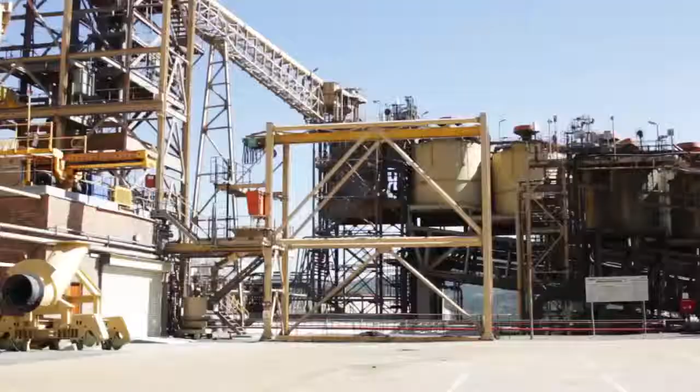Most continuous production processes operate for less than 30% of the time in ideal state, which represents substantial losses in terms of production output, costs, asset performance, quality, and impact on the environment. The time-in-state program implements a solution that increases the percentage time in ideal state and thereby delivers higher operational efficiency and effectiveness. Results include more than 18% increase in production output and increases in energy efficiency of over 7%.

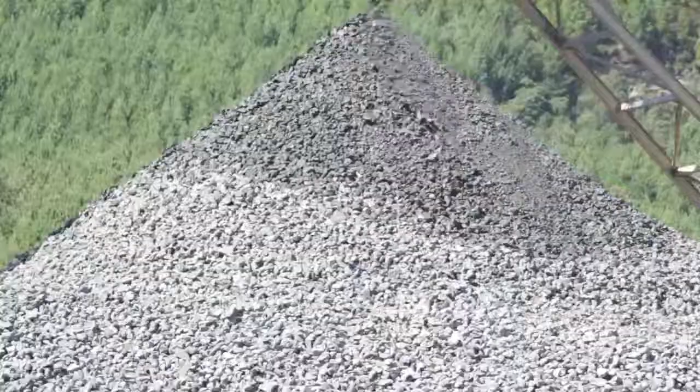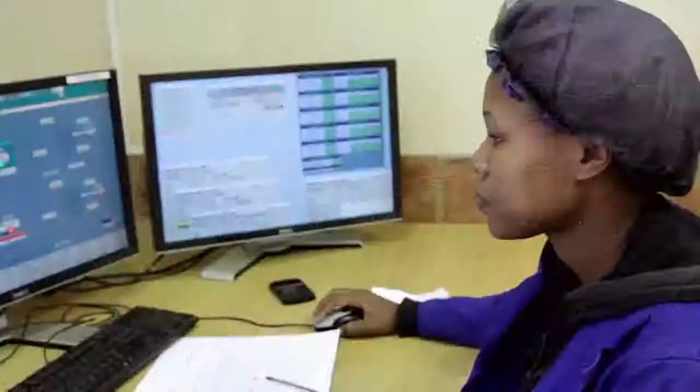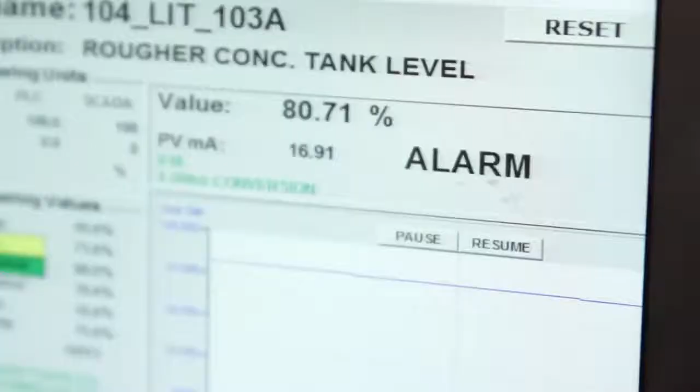These improvements translate into multi-million-dollar gains. These gains are delivered without changing the production process or equipment configuration. In any continuous process, maximum productivity is reached when equipment functions in ideal state or the optimum operating envelope as much as possible. The problem is that processing plants observe significant variance in performance, irrespective of sophisticated process control systems. In fact, most continuous processes run in ideal state for less than 30% of the time. Needless to say, this has a massive impact on profitability.

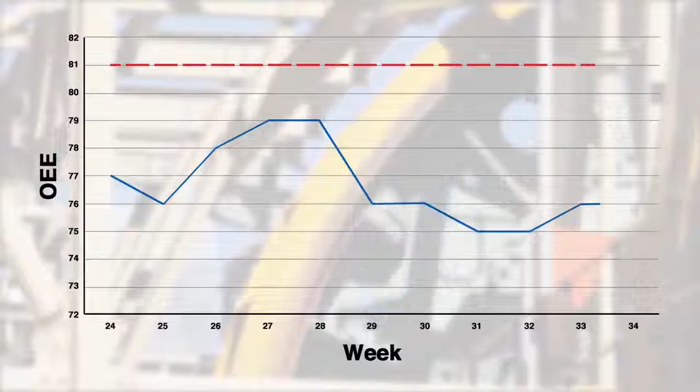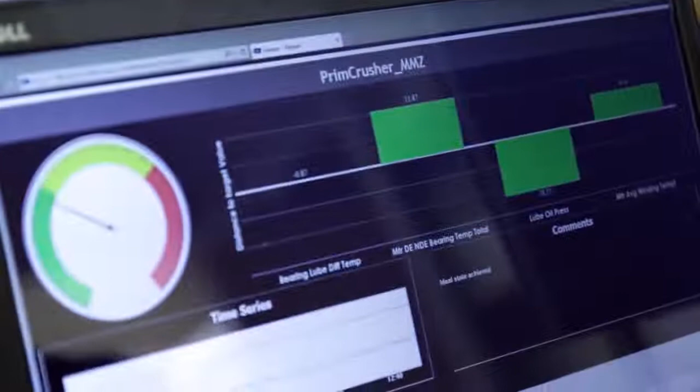Over the past few years, various performance measurements like OEE have been applied in industry. Unfortunately, these solutions have their limitations and, although perfect for discrete processes, they can mask inefficiency in continuous processing plants. The time-in-state metric was developed with the objective of empowering operational personnel in continuous process environments to proactively affect performance and profitability. Time-in-state is a MESA International endorsed metric.

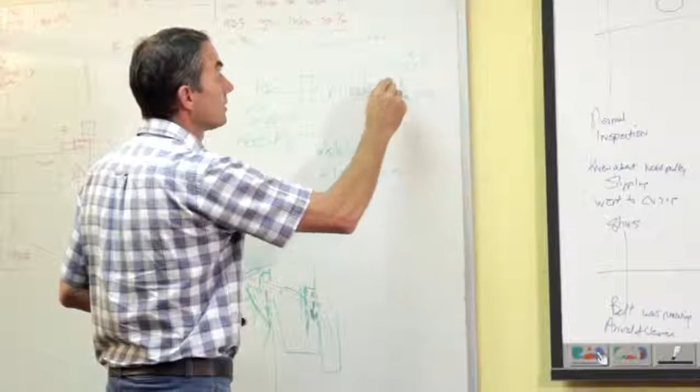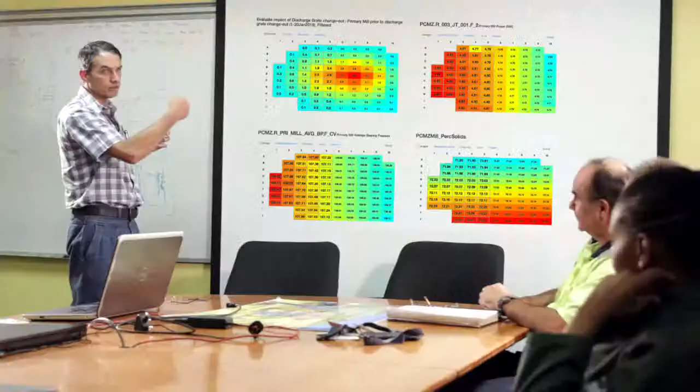The time-in-state system is implemented in various phases, starting with a current state definition and the compilation of a performance driver matrix, a critical element to facilitate emotional and intellectual engagement. Time-in-state analytics is then used to extract and visually represent variable interrelationships in performance maps. These maps aim to define specific operating conditions that associate with high performance.

The implementation of the IME time-in-state metric was a fairly easy process. It was well facilitated. They had constructive communication with these guys. So in explaining to them what the process is doing and what the model will help them to do, there was frequent interaction and face-to-face contact.

Continuous measurements are depicted on performance maps as a matrix of values describing process behavior and conditions. This way, patterns become apparent and enable the identification of internal benchmarks or baselines. They've taken a vast amount of data, looked at the data, analyzed, saw the trends, and identified the major KPIs that contribute most to the optimal functioning of the plant. A well-documented and well-defined reporting tool. Time-in-state was essential to see when we were getting the best performance out of specific unit operations. It takes out personal preferences, past experiences, and looks at the data and information at hand to inform the optimization process.

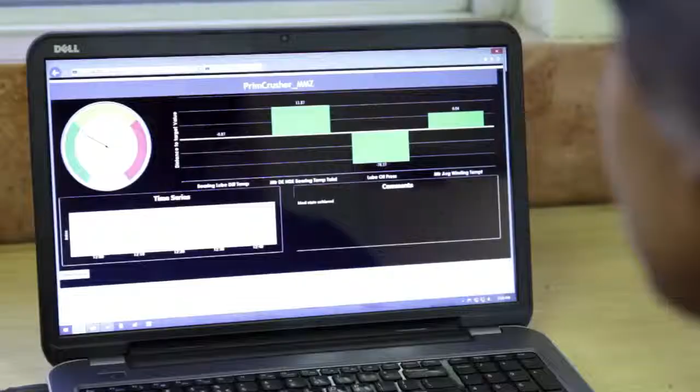After deploying and integrating time-in-state models with a control system, the system continuously tracks when and how close the functional unit is operating to baseline, while depicting the key influencing factors that are causing the unit to deviate from ideal state. A user-friendly graphical interface further empowers operational personnel to address issues in real time. The performance index dial on the top left-hand side indicates how close the system is operating to the ideal state, represented by the green range.

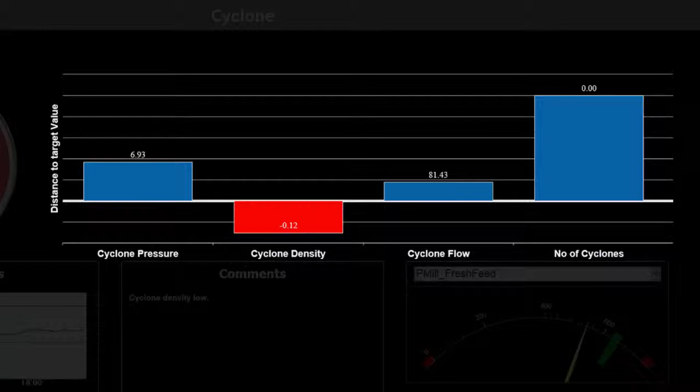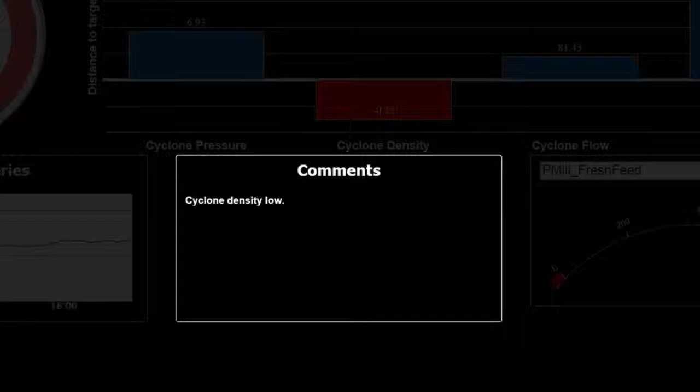To the right of the dial, the key process influencing factors are displayed as bar graphs. The dial will move outside the green range as soon as any one of these key factors exceeds defined constraints, and the particular key factor bar will turn red. An information box in the lower middle part of the interface displays context-sensitive information, which will enable and guide operational staff to take the best course of corrective action. It's a much simpler and easier way for the operator in the control room to know this is the first thing I need to actually go and do. And that has got a real-time effect on the production of the plant.

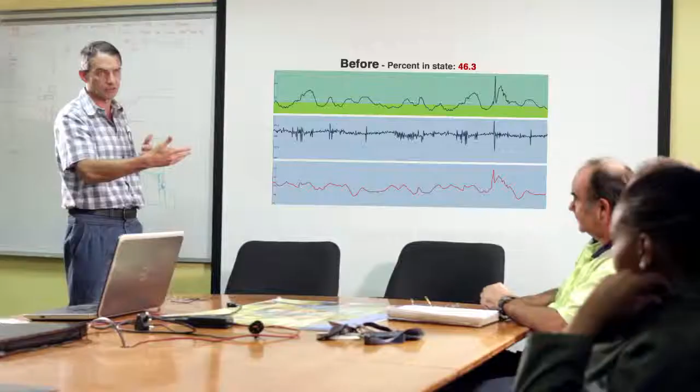After implementation of the solution, mapping is repeated for the now more stable process to confirm assumptions and mental models. Detailed reporting provides practical and useful functionality to management. A big benefit was that IME came to site. They spent time with the foreman, they spent time with the control room operators. The weekly meetings, especially in the initial stages, were key to actually make sure the bigger team were all aligned. We managed to get real facts where people could debate on an open forum without funny opinions and misguided opinions coming into play. So it really did serve to focus a lot of our discussions and optimization sessions.

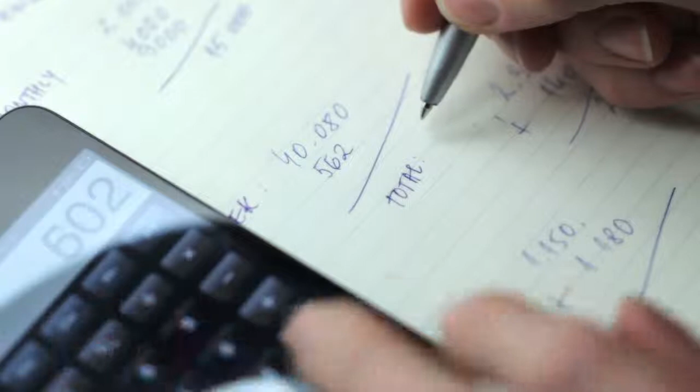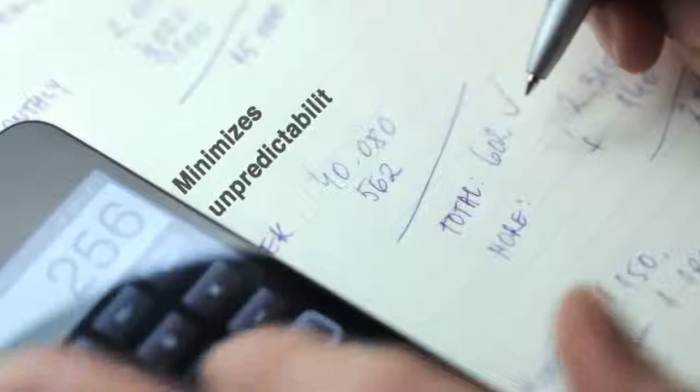The implementation of the time-in-state metric brings about considerable financial improvements within continuous process industry companies. It enables excellent control over operational risk, simplifies usually complicated decisions, and minimizes unpredictability by addressing variances in efficiency in real time. Improving recovery has a major financial benefit to us. We actually saw improved recoveries, and there was a definite improvement in the quality of the product that we produce. So that was a huge financial benefit.

Time-in-state is also an invaluable tool in terms of motivating capital to be spent in the organization. We've seen a significant improvement in plant performance. There's a significant cost benefit in changing a piece of kit in a planned fashion rather than in a breakdown fashion. Reducing production losses, and also created a sense of stability and predictability on the plant as well. Processes and procedures are streamlined and optimized like never before, enabling the continuous process plant to reach and maintain highest levels of efficiency.